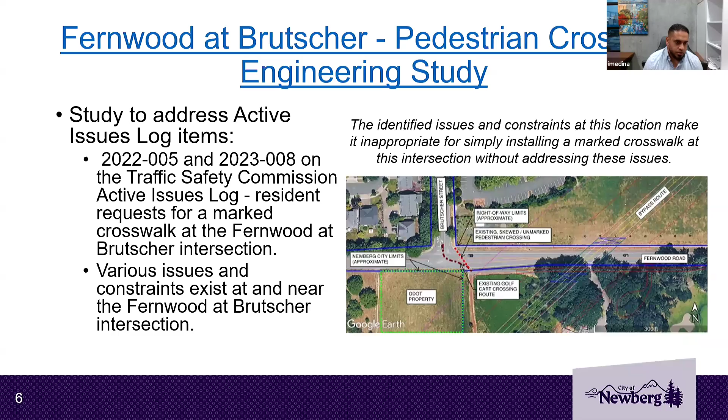If you go to the next slide. There's a planned Dundee Newberg bypass route shown here adjacent to the site, about a couple hundred feet east of the intersection. There's an ODOT property south of the intersection that's outside of the city limits as well. There's an existing city ordinance that allows golf carts to use Brutscher and Fernwood to get to and from the golf course here. As you can see, the red dashed line here is the current natural pedestrian crossing path. It's a pretty aggressive skew, and it's really not ideal for vulnerable users, elongating their travel path and increasing risk for motorist, non-motorist accidents here. Go to the next slide.

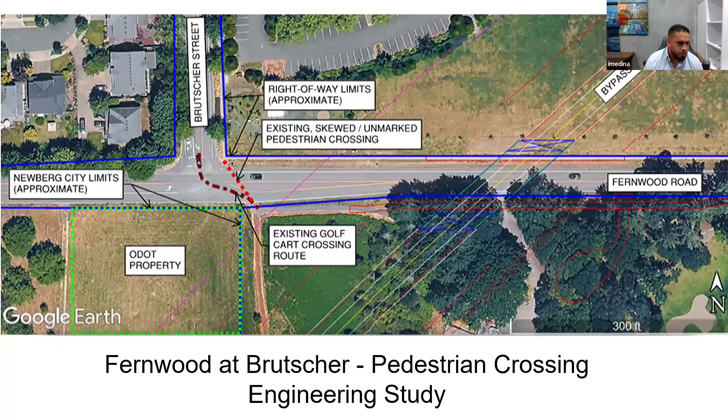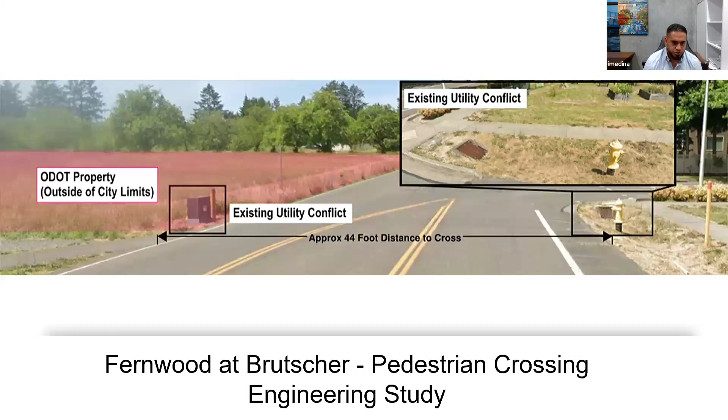Additionally, there's some existing utility infrastructure that would have to be relocated. Even if you were to straighten out the crossing here, we're talking about 44 feet approximately for pedestrians to have to cross at the site. Again, not making it ideal for vulnerable users here. Next slide.

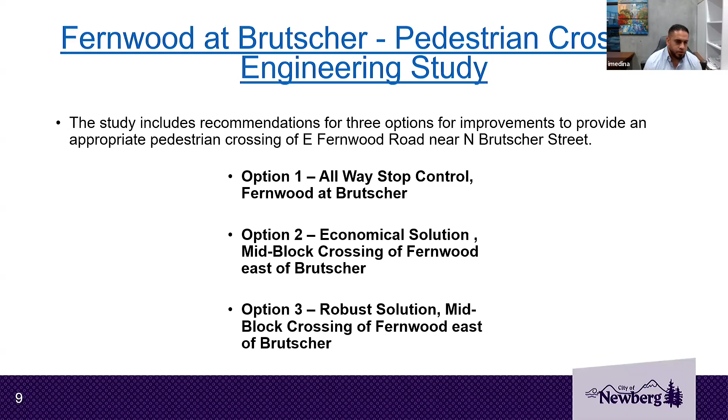So Keller performed all-way stop control warrants, pedestrian hybrid beacon warrants, and reviewed FHWA's recommendations on marked crosswalks at uncontrolled intersections, which is what we find here at Fernwood Brutscher, and developed 3 different options. Option 1 is converting Fernwood and Brutscher to an all-way stop control condition. Option 2 is an economical mid-block crossing solution of Fernwood east of the Brutscher intersection. Option 3 is a more robust mid-block crossing solution east of Brutscher as well. Next slide.

So option 1 is, again, we'd convert the intersection to an all-way stop control condition by adding stop bars, stop signs, a marked crosswalk east of the intersection, proper illumination, and signage as well. This would require us to close out the existing crossing location and integrate a receiving pedestrian ramp on the south side, which, if you can see here, approaches into that ODOT property. So that would likely require acquisition and annexation to accommodate that. All of this would require coordination and cooperation from the Chehalem Parks and Rec District as well. Our engineer's estimate shows this to be about $66,000.

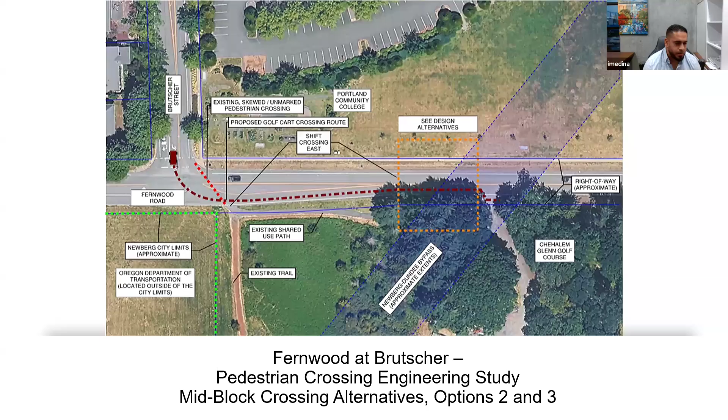Due to the previously mentioned site constraints, shifting the crossing east to a mid-block crossing location, effectively reducing the crossing distance, was considered. So the next couple options are a mid-block crossing location in this relative location. Exact location yet to be determined, but somewhere in this vicinity.

Option 2 is an economical mid-block crossing solution, again east of Brutscher. This would require curb extensions, integrating receiving pedestrian ramps, high visibility markings and signage, as well as proper illumination. We would connect to the existing trail system on the south side. This would also require elimination of the existing crossing location and rerouting the golf carts to a maintenance access just east of the site. This option would also require coordination with CPRD, and the engineer's estimate for this was about $65,000. The good thing about this one is it doesn't conflict with the planned Dundee-Newberg bypass, which makes it an ideal, cost-effective, quick-build solution for the site right here.

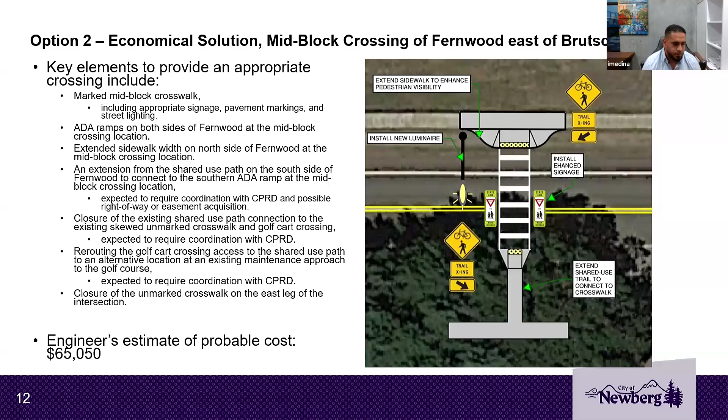Third option is a more robust solution. It's also mid-block crossing, similar to the previous location. This one would integrate a speed table, 3 to 4 inches above the roadway, as well as curb extensions, receiving pedestrian ramps, high visibility pedestrian markings and signage, as well as a rectangular rapid flashing beacon. This one would also connect to the existing trail in the south, eliminate the existing crossing location, and reroute the golf carts just east of this. Engineer's estimate for this is approximately $118,000. However, this crossing would reduce the vertical clearance of the planned overpass by the 3 to 4 inches mentioned, which is a pretty critical component of that project.

Next slide. I think that's it. Any questions from the group?

Hi, this is Russell Johnson. The third option, without raising the crosswalk and worrying about the raised grade, do you know what the difference would be? I think you're just basically adding the flashing lights to option 2. I believe you're right. Yeah, it'd be rectangular rapid flashing beacons. Last I checked, those can run you up to $5,000 versus just the signage, which is about $1,000. So I'm thinking it'd be tough to tell, but for the concrete work to integrate the speed tables, you're talking $25,000 maybe. So if you go back a slide, what's the cost here? 118. I mean, we may come down to $80,000-$90,000. But there is some cost for those rectangular rapid flashing beacons.

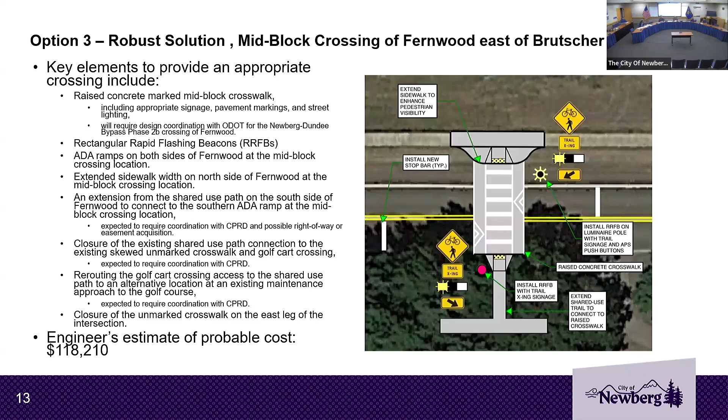I'm concerned that the lines of demand are, perhaps among others, isn't there a trail heading due south off the edge of the picture, right about where the words 'install new luminaire' are? And it continues right next to that and keeps going south. Isn't that one of the significant places pedestrians are going?

That is correct. So if they're coming from the college or anywhere else north of here, they're going to have to make this big U-shaped detour to get back to that trail. And I'm concerned that they won't. They'll continue to cross without help, and we've done nothing for them. So that's my concern. I'm fine with this all going forward, and that's what I have to say.

Appreciate that. You're probably not the only one that has that concern overall with that option. Brent, you also brought up the fact that this is still early days. This would become a capital project. If there's interest in pursuing this option, there could also be interest in negotiating with ODOT to buy that little piece of corner there to straighten that path out so it lines up.

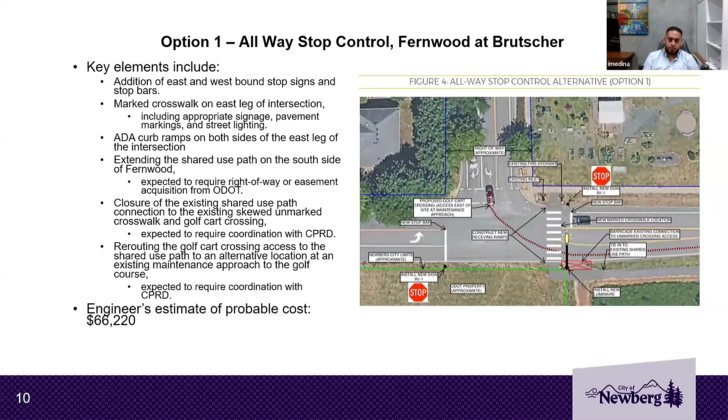And that's where we're presenting this option. Any more questions or comments? Okay, thank you very much. Thank you, Ish.

Next on the agenda is staff reports and general information, starting with police. I'll let Counselor Hagan continue, but he had provided some information on where the radar trailers were deployed most recently. That information, a map in your packet, indicates that.

Is there one trailer moving around, or this many trailers all there at the same time, or what? I don't know what the map means. So, yeah, the map gives the locations over the course of, I think you'd given me between July and September, the different locations. How many trailers then? We have 2 currently.

As far as any other staff report from the police side, I don't have anything specific other than we just got some grants renewed for the upcoming year, which allows us to hire officers on overtime to come in and do specialized enforcement for DUIs, distracted driving, speeding enforcement. So that's good news, where we'll be able to have some extra staff on the road for things like Super Bowl weekend and New Year's Eve and all the big holiday areas for specialized traffic enforcement. As always, I'm here to answer any questions throughout the evening, but that's kind of all I have at the moment.

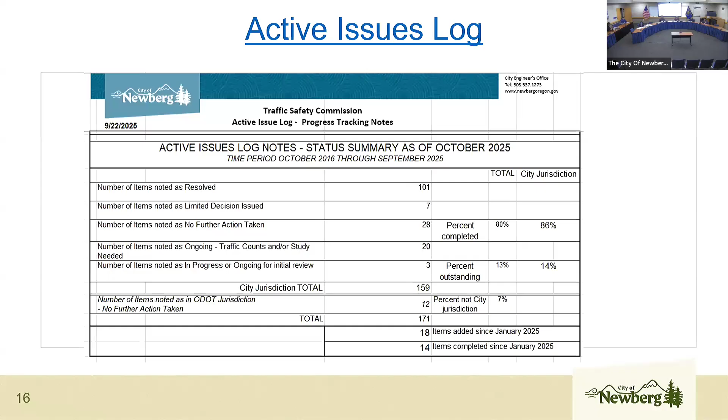Some other general updates: the city manager and the mayor worked through to do a closure of East Illinois at North Main. That's gotten installed and is in place now. It's done as a temporary thing to confirm that it actually achieves what they were intending with that.

I spoke with a resident who lives on Illinois and Washington at that corner. They've really seen the traffic calm down quite a bit, because it used to be what he called the drag strip in front of his house. Now there's no traffic through there on Illinois. There's more traffic on Washington as people turn down there to get over to 219 or 240.

He had some requests to maybe get trees trimmed on the commercial property there so people could see better around there. I gave him the link to the issues log to enter that in so we can follow up and distribute it, whether that's a maintenance issue or potentially a code compliance issue. He thought the trees block some visibility, and trimming them might make it safer, since there's more traffic on Washington now than there was before. That's good to hear. The city manager has also expressed interest in getting feedback like this directly, so that can be passed on to him as well. Generally, they're very pleased.

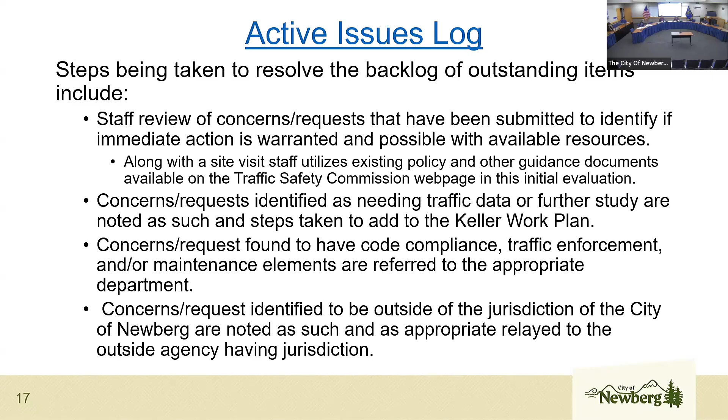There are a few there that Alan, our GIS analyst, has been helping collect the speed data on. He's just gotten me information, so we'll be updating the log with that where they're at. So far, there haven't been any of the speed data collection ones where we're seeing anything truly excessive, with the 85th percentile being dramatically above the posted speed limits. So nothing into that, but we'll continue to monitor and watch for those things as they come in.

I guess the one you just sent me today, though, I need to double check and look at that one. But so far, all the ones we've gotten collected, we continue to run through.

Along with collecting that speed data, there's an initial review typically done by myself when these issues come in—a first glance to see is a study needed, is some data needed, is it a code compliance or maintenance issue or whatever that might be, to get those directed and knocked off as quickly as we can to move them forward. That continues to happen.

And then after the active issues log and items within that, through the decision of the city engineer using that authority, we have an upgrade to the traffic control devices at Springbrook and Haworth to put in the flashing stop signs that PD had requested. They presented the data to support their request, and that moved forward very quickly with the city engineer working with the city manager and the public works director to get those installed.

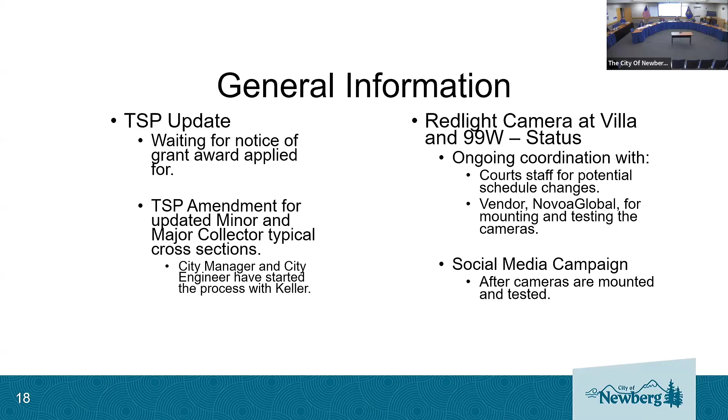I have some comments, hopefully brief. I just want to express my appreciation to the commission and the staff and how much I've enjoyed my time here, at this, my last meeting. This is the conclusion of the term for which I was appointed, and it's been nice knowing you. I really appreciate working with all of you. So thank you. Thank you, Rick.

So your 3 years is up? For some reason I was appointed to a 2-year term. Maybe they knew what a troublemaker I was gonna be. Or the mayor didn't like something in my application. I don't know, but 2 years. All right, it's been great having you, Rick. Thank you.